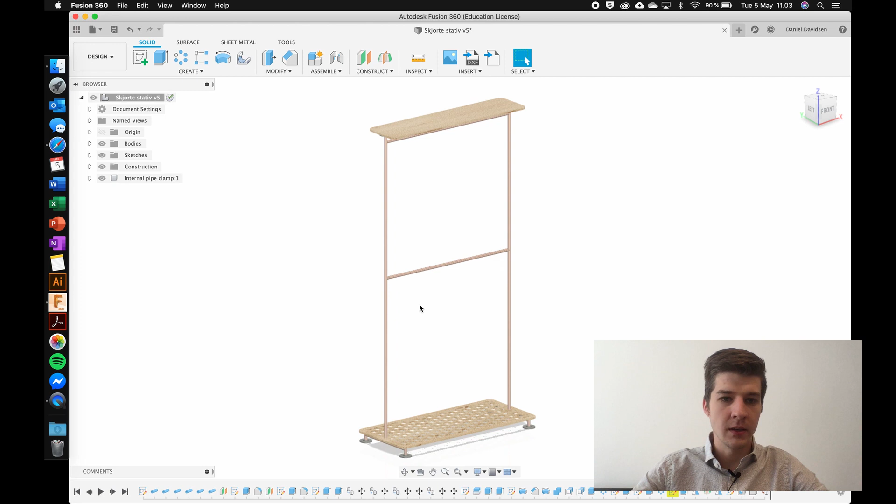So a small example that I have here today is that I made this small dressing shirt rack here, and in the bottom I made this plate. It has this particular pattern in it, and this is a perfect example of a job that you would run on a CNC mill. It would just take forever to do it by hand, but it's an easy job for CNC.

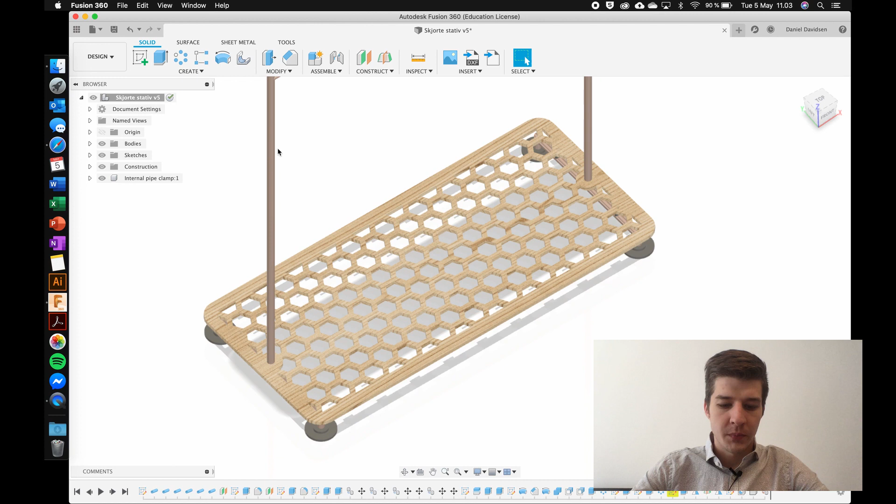So what we're going to do here first of all is go into the manufacturing workspace. This is a video about how to do the milling and not how to do the actual design, so we're not going to go into that.

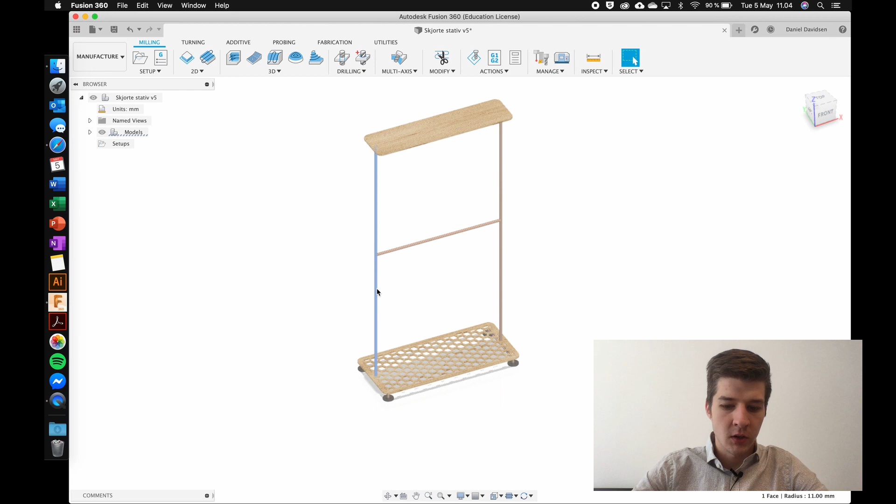Okay, so here we are in the manufacturing workspace. The first thing that I'm going to do is hide some of all this stuff. So I actually have both a top shelf and a bottom shelf here. First thing I'm going to do is hide all these pipes. If I press on one of them and type V, that's going to hide the bodies and components. So I have a few bodies here.

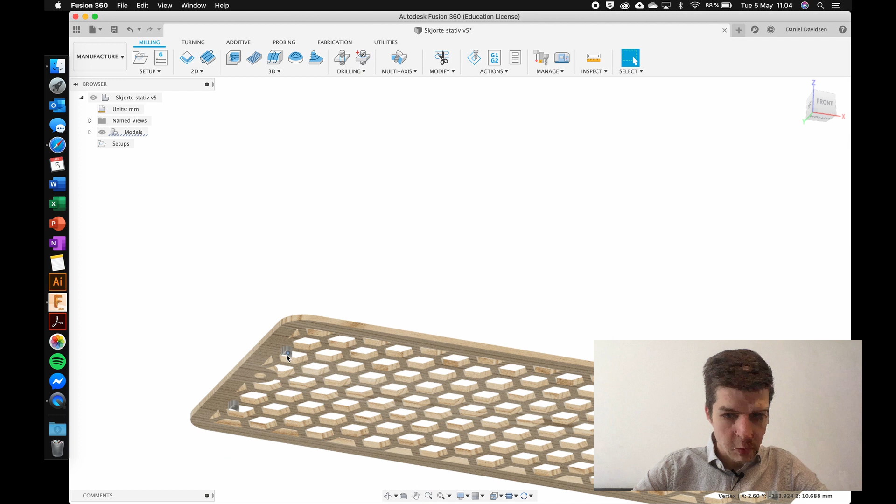And I'm also going to hide these feet. And then I also have some small spacers in here that I'm going to hide away. And for now we're also going to hide all the things here on top. I'm just going to highlight those, type V. So now the only thing that I have in my workspace is this one sheet here, and this is what I'm going to set up for the CNC mill to do.

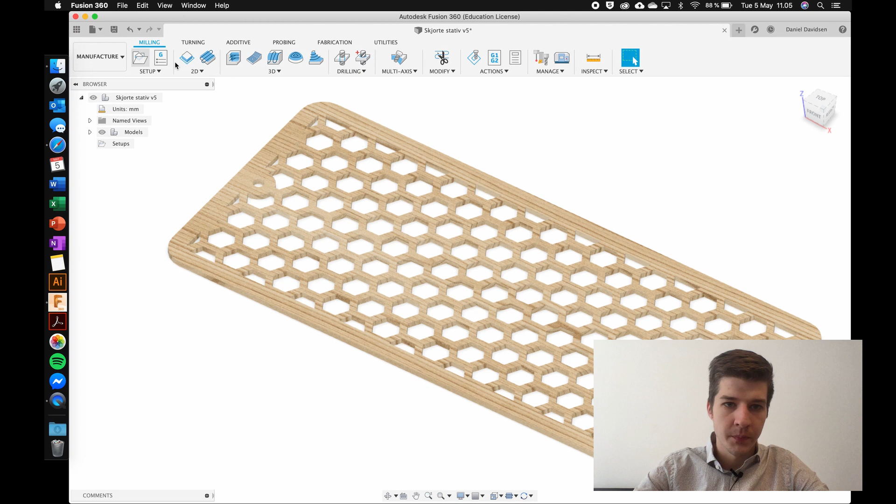Okay, so what we're going to do here is set up the job. The first thing I recommend is that we figure out how the setup is going to work. So the first thing we need to do is click Setup, and that is going to start out by highlighting your model. Because we hid everything, it's going to only select this one part as the selection and the work area, shown by the stock around it here.

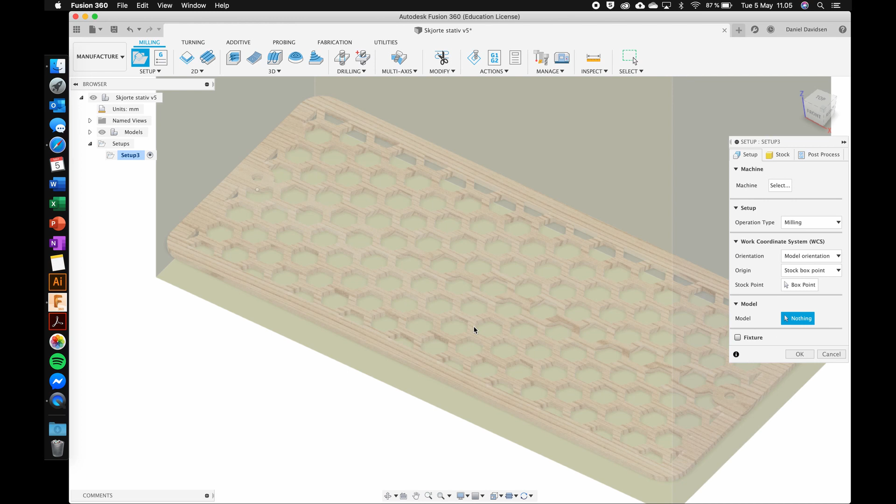If yours is bigger, it might be because your model is not selected correctly. So if I unselect this, you might see that it's trying to put the stock around the whole cabinet or the whole rack. So what I'm going to do instead is just click on the model here that I want to work on, like this.

The next thing I want to do is take care of this work coordinate system, and that's where the start point for the CNC mill is going to be and how the orientation is supposed to be. That's going to be specific to each machine. Where I work, we have a CNC mill, and we put on our website how the X, Y, and Z are going to be.

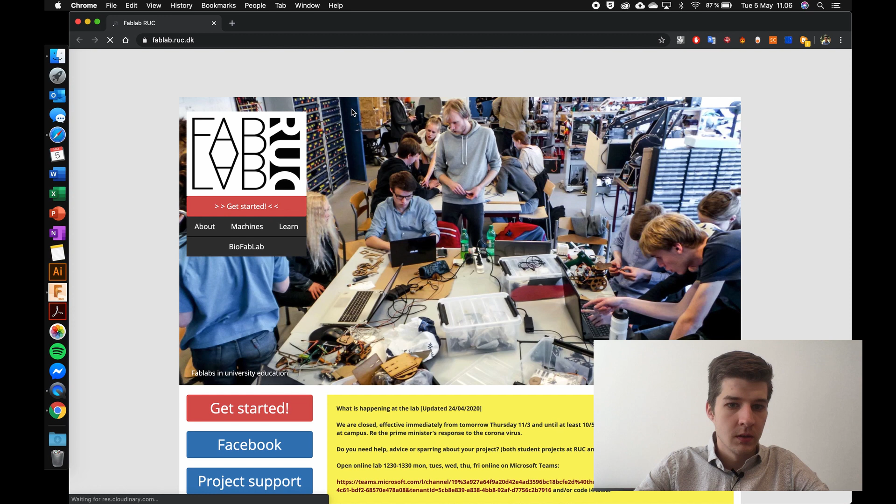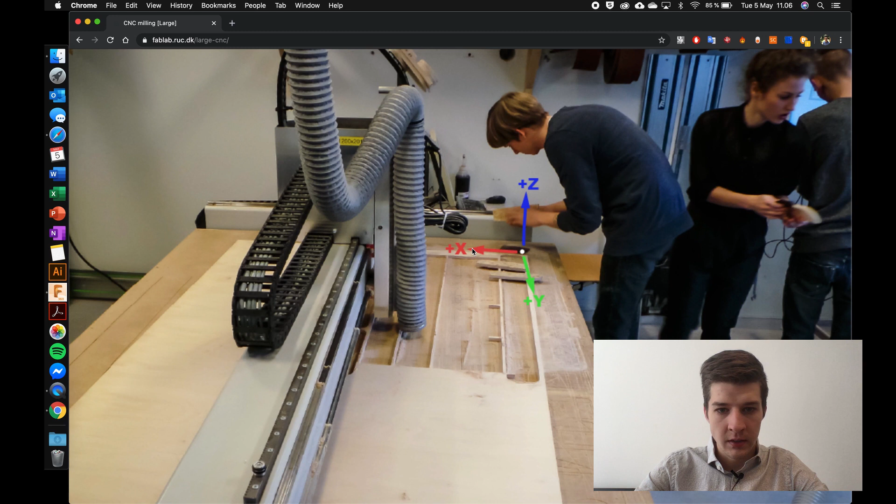So if I go to Fab Lab, under here we have the tabs for machines, and all the way down here at the bottom we have something called the CNC Milling Large. This is the machine that we're going to operate. So we put in the picture here that this is the X direction, this is the Y, and upwards is the Z direction.

And we usually put the start point here in the end, so that's also how I want my start point inside of Fusion to be.

Another thing while you are here that you might also want to do, down here for Fusion 360, is use the tools that we have available. You can download our tool library here. If you press this button, it will direct you over to Google Drive, and you should be able to download it up here in the corner, which gives you a file that you could save.

Okay, so how do we correct this work coordinate system? What we start by doing is this orientation, model orientation, or we can press this one, and we can either choose a Z-axis and an X-axis, or a Z and a Y-axis, or some other options. So what I'm going to do is choose the Z and the Y direction.

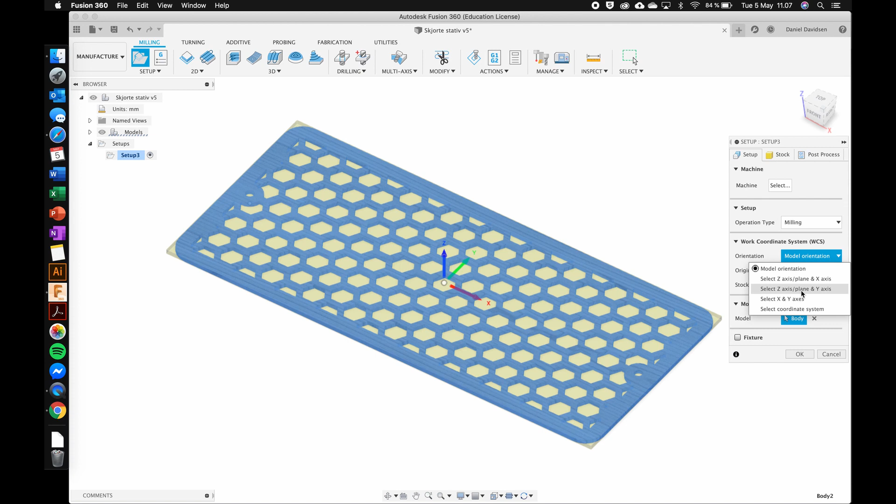It starts by highlighting the Z-axis here, and that is already going upwards, just as I want it. So I don't necessarily have to give that a direction, but I can select either a face that is normal to or perpendicular to the Z-axis. So I can press this top face here, and that's going to give me the way.

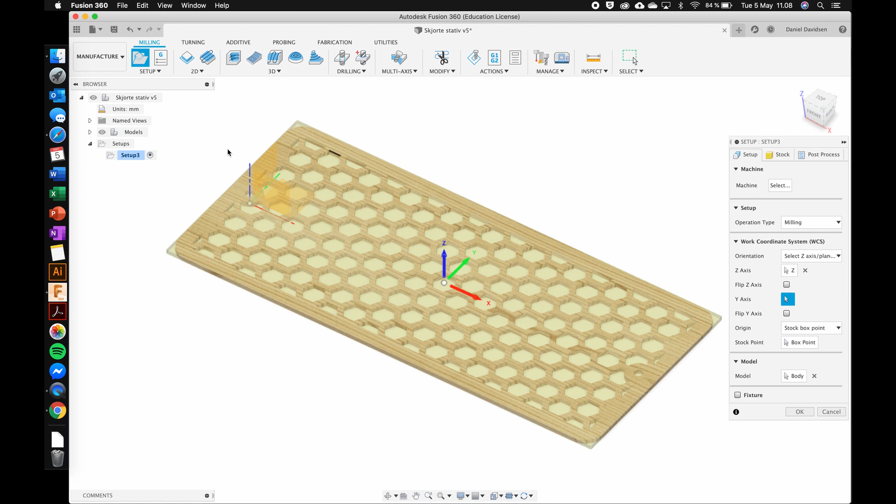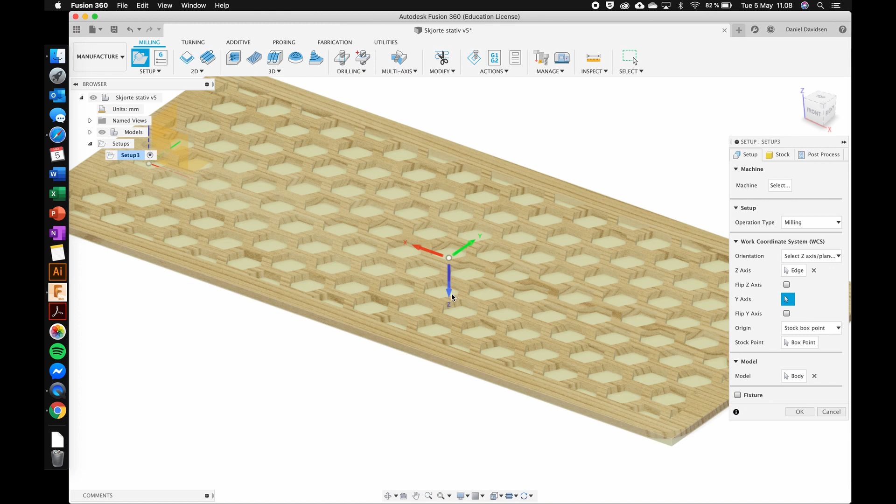I can also press this axis right here. An edge that is parallel to the axis, and I can even use my models, so in here we have an axis that is also going to be parallel to the Z-axis. It might be flipped like here because I chose an axis and it's just going to flip it. It's not a big deal. I can press either on this arrow right here and that's going to flip it, or I can press over here on the flip Z-axis.

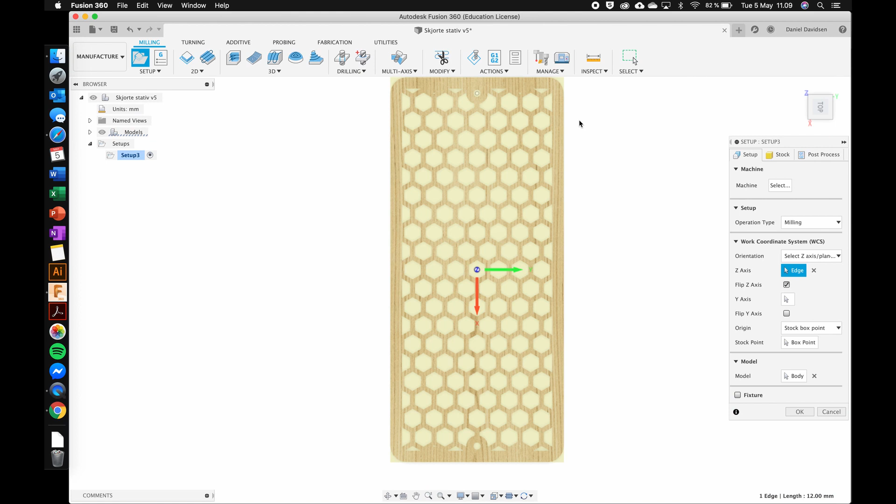So the next thing I'm going to do is, I want it to be the Y-axis. I'm just going to select that one. How I want this to be oriented is that I want the start point to be up here, and I want to have X in this direction and Y in this direction.

So I'm just going to press Y-axis, and I'm going to press this one here, and that should flip it so that my Y is now parallel to that axis. But again, if we go into the plane, I want the Y-axis to be pointing in this direction, so I have to flip it. So again, I'm just going to press on this arrow, and now you see that I have Y, X, and Z in all these configurations.

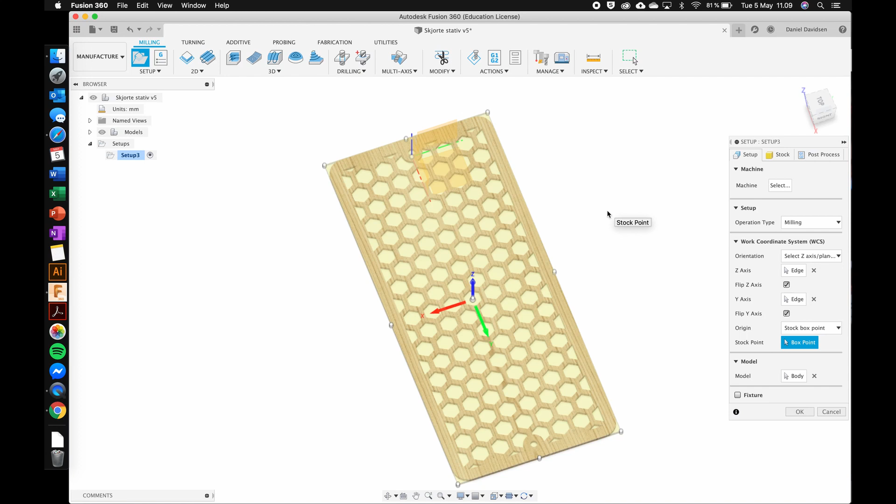Now I just want to put the start point here up in the corner. How I'm going to do that is I'm just going to press this one, stock point, and that's going to give me different points on the stock here. So I get some points, and I can press, for example, this one, and I want to make sure that it's on the top one up here, because when I go in with my CNC mill, I'm going to touch off on the top face, and that's going to be our start point.

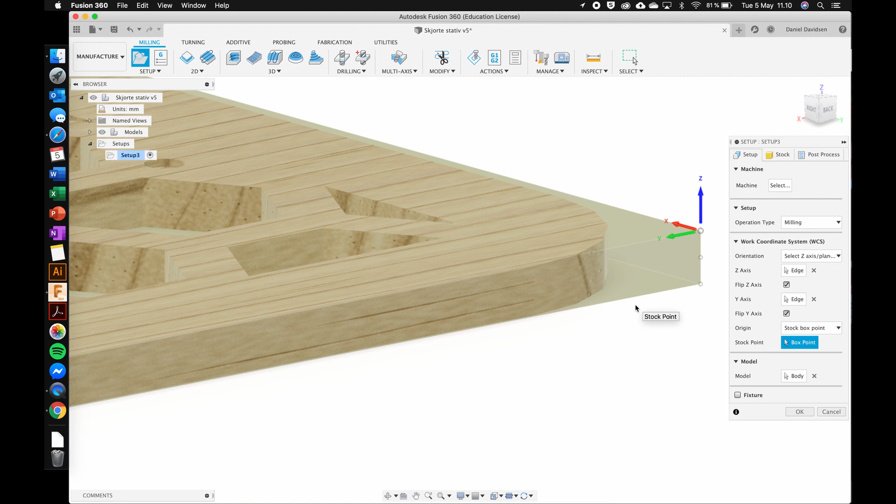So the next thing that I want to do is make sure that there is no additional stock. Underneath this tab right here called stock, there is this thing called offset mode, and I can put this to no additional stock. First of all, I'm just going to show you what it is.

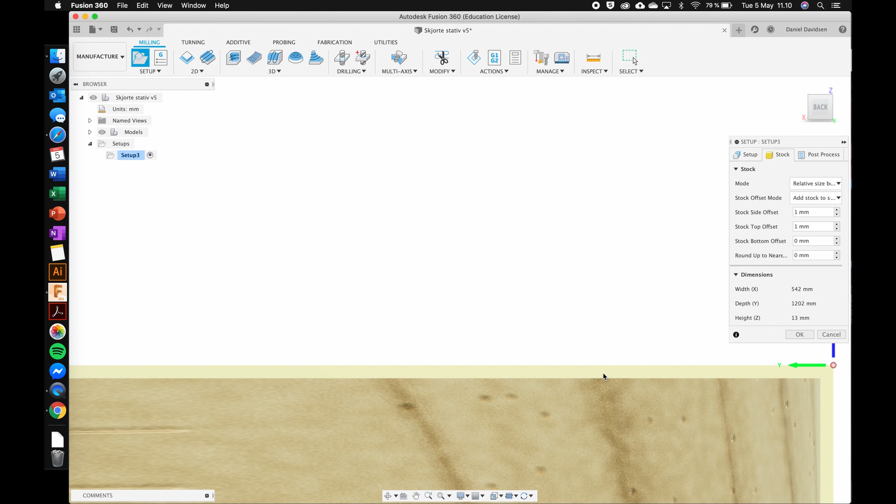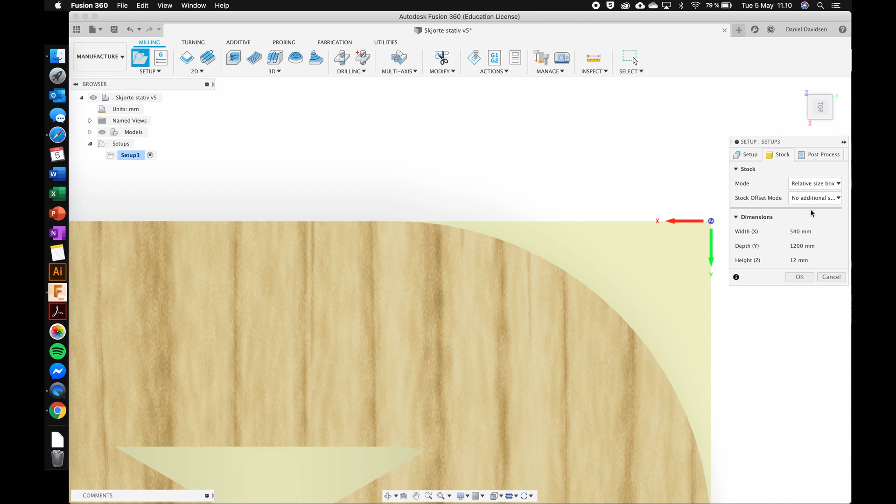So if I choose to go to a face that is directly on the side, you can see here that it puts a little bit of stock on the top side, and I don't really want that. The same thing goes for the sides, that it puts additional stock on the outside. That's usually what we need to do for metal work, especially because we want to face off sides or something. We don't really need to do that in wood as much, so I just recommend you to do no additional stock mode.

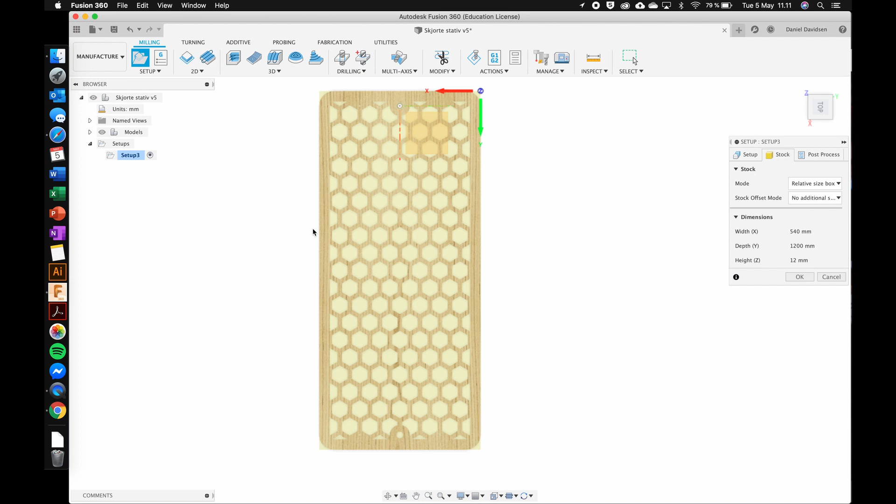So that's just going to put this as the dimensions that you need to cut. So I'll need to have this piece. I can see here that it is 1,200 millimeters in this direction, and it's a 12 millimeter thick plate, and it's going to take up 540 millimeters in this direction. So that's all I'm going to do here, I'm just going to press OK.

So now I have the setup done. Now I have to create the tool path that is going to tell the machine how to operate. So this pattern right here has a lot of these internal holes, and I don't want to select every single one of them. I just want to make sure that it actually does cut the inside of all of this before it cuts the outside. It's very important that it doesn't cut the outside first.

So the way I'm going to do that is, we have a lot of different toolpaths to use from, but you can use the contour mode under 3D here. So if I tap this button here, I get my menu, and then I have to start out selecting a tool that I've got to use.

This is where it's important that you had downloaded the tool library that we had. So right here I have what's called the Raptor machine. This is the tool library that you just downloaded, and in here we have different tool selections. When you want to import a tool library, you have to right click on local and then press import, and then you just have to tell it where the location is. For me it was under downloads, and here is my Raptor tool library. I'm not going to open it because I already have it.

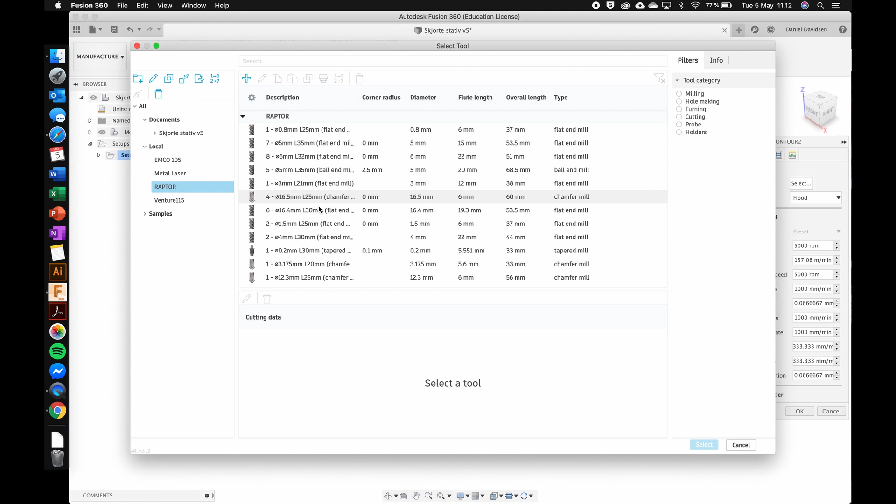So Raptor, and the tool that is most often used in the machine most of the time is this 3mm here.

With the new tool library here, we also added cutting data, so you can select softwood right off the bat, and that's going to have a lot of the different parameters built into the tool, so you don't have to do as much fiddling around. So I'm just going to select that.

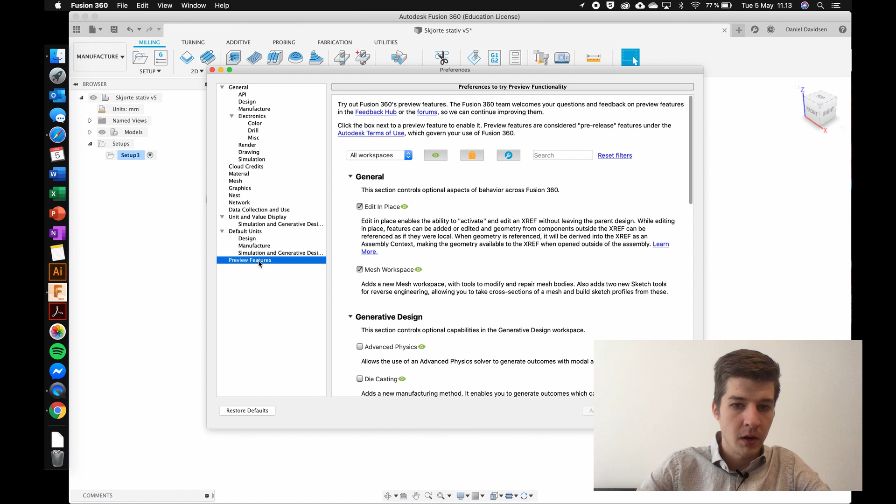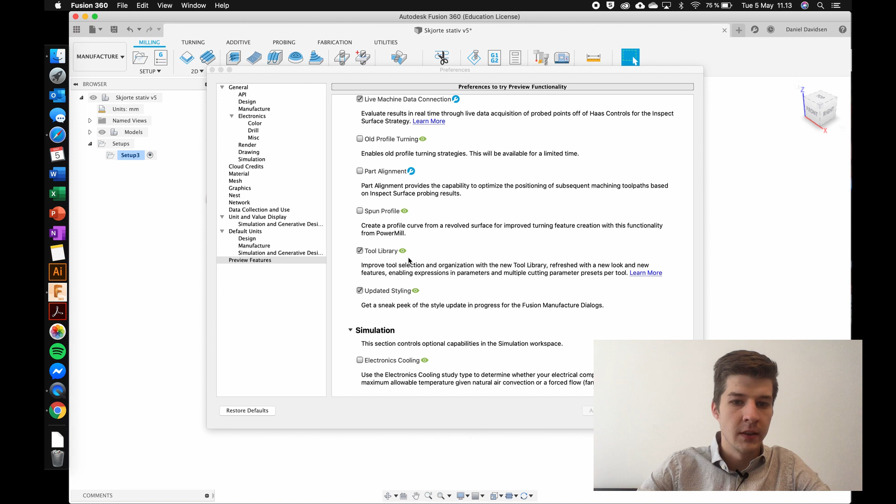If you don't have the tool library looking like that, you could go up here under your name, then go under preferences, and down here at the bottom there's this preview features, and under manufacturing there's this thing called tool library. Right now it's a preview feature. I recommend you turn it on just because it will improve how your selection works, but in the near future this isn't going to be here anymore because it's going to be default inside of Fusion.

Okay, so contour, that's all what we already did. Selection tool, Raptor machine, and this 3mm and softwood. You can also do the presets right here, so you can choose either the default preset or the softwood. It's programmed so that if you do the softwood, it's going to have the correct feed rate.

So the important features you have right here is that we are spinning our spindle at 24,000 RPMs, and the cutting feed rate we're using is 1600 millimeters a minute. That's because the step down - what's called a step down - is how deep the tool is cutting at each pass. You have to figure out the correct feed rate compared to how deep you're able to cut.

Okay, so the next tab up here is called geometry, and what you have to do here is select where the tool should cut inside. So if I choose this outer perimeter right here, it's going to default to selection and have a chain machine boundary. So what I'm telling the machine is that you can only work inside this area. You're not allowed to work outside of that, and because of that, it's also not going to cut out the outside perimeter of all of this.

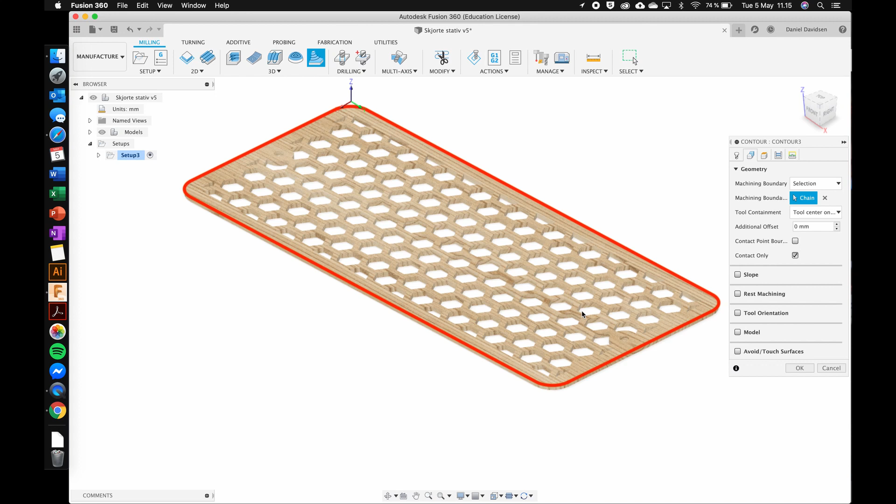So the next thing I want to do is go under tabs, this tab up here called heights, and on the bottom height I recommend you, when you have a through cut like this, put it to -1 millimeter. That's just making sure that in case the material is maybe 12.2 millimeters thick, or the whole bed of the machine isn't level, we actually cut an additional millimeter below just to make sure we get a cut that goes all the way through.

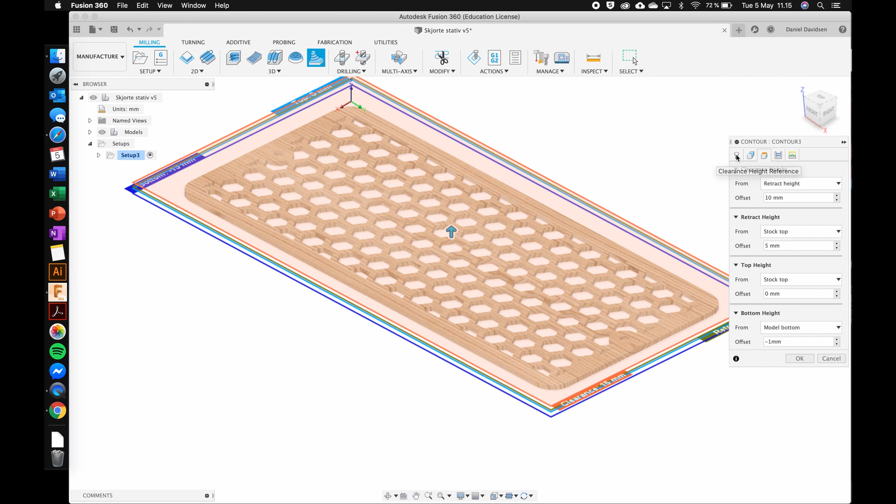So the next thing here is heights. We're not going to do anything in here because we already have the tool library done, but the important parameter in here is that there is a maximum stepdown that's set at 8 millimeters. We might come back and change this, but I'll show you in a minute what it's for.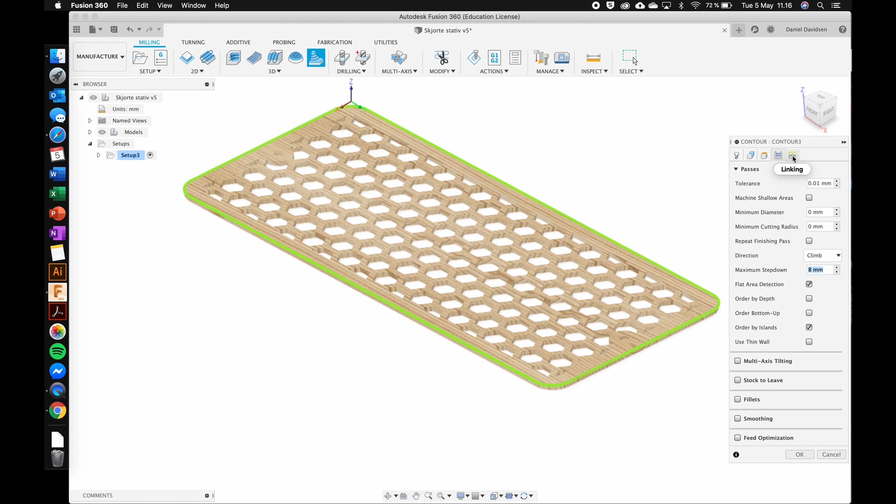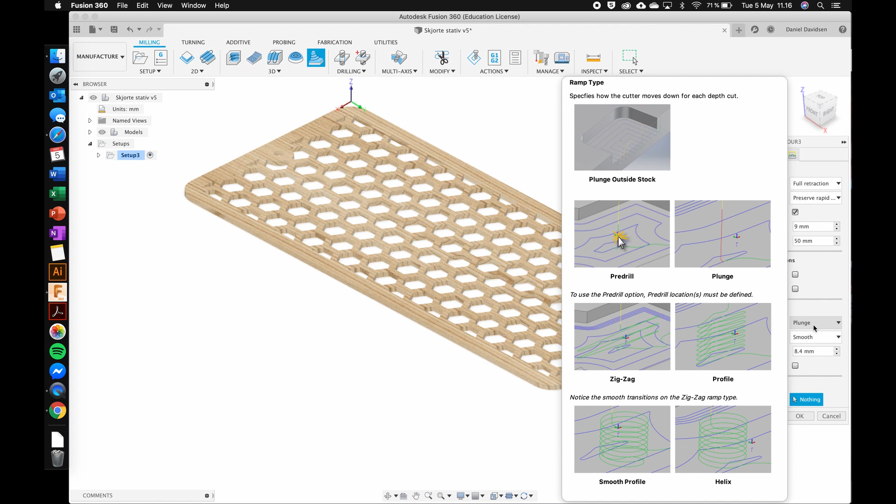The next thing is called linking. What I recommend you do here is turn off lead in and lead out and put the ramp style to plunge. If I hover over this, you can see some of the different things, where plunge is the second one here, where we just go straight into the material, where helix is the one on the bottom right, like going in a spiral, going into the material really slowly, which you need to do for good chip evacuation in metal, but it's not necessary for soft materials like wood. So plunge is just what I recommend you people to do. And then I'm going to click OK.

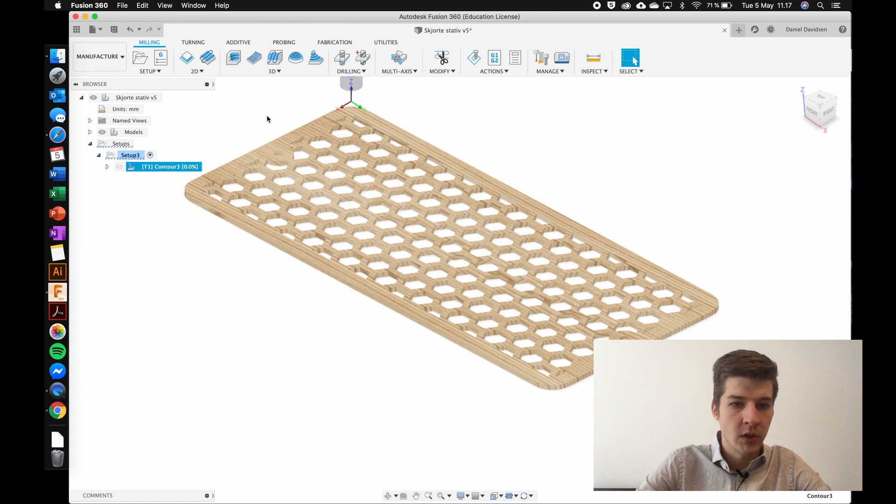So this is going to generate a toolpath, and it can take a minute to process, because it's going to calculate everything and figure out how to run it, and then give you a preview of how the tool is going to move. So there we go - all the blue lines show where the bottom of the tool is going to be. Each line represents how deep it's going to cut. It's going to cut in 3 passes - around this blue line, then the other blue line, and the last blue line in the bottom.

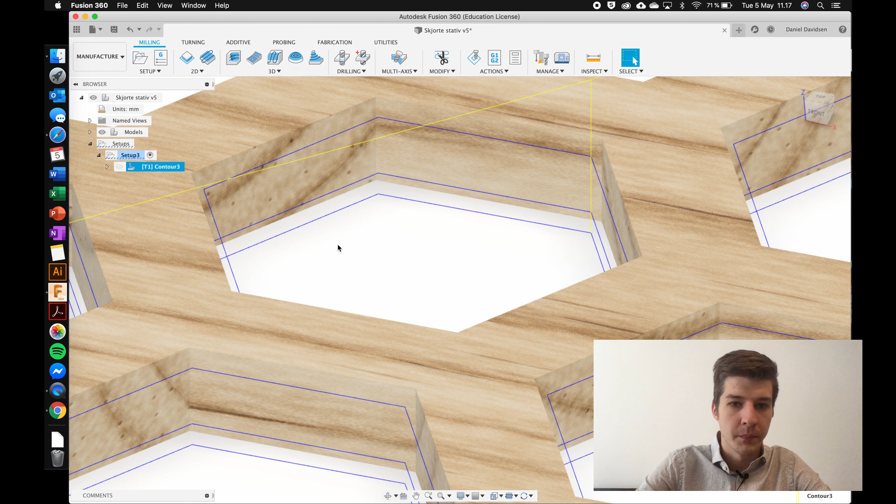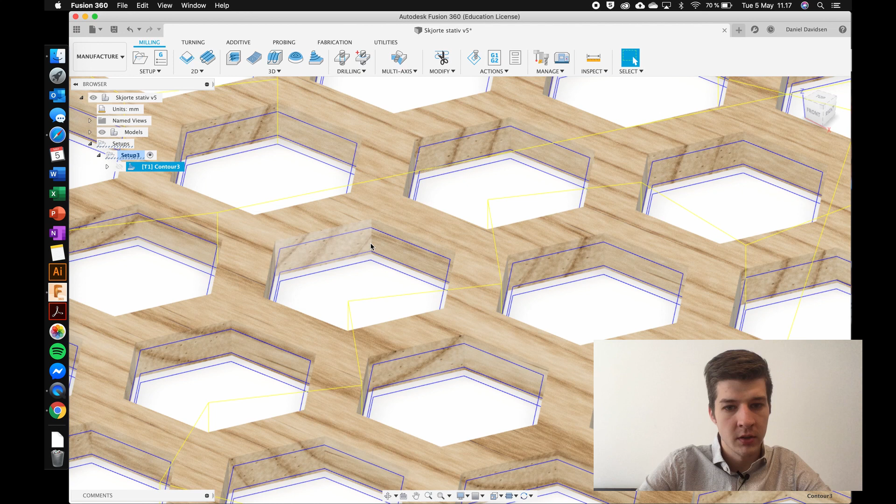And then we have all the yellow connections, that's where it's going to go up and over and into a new hole. So I want a 12 millimeter plywood sheet to be cut in 2 cuts, going down 6.5 millimeters first. It's going to do a 12 millimeter cut total, so half would be 6, but I added another millimeter at the bottom. If I put this to 6.5, it's going to go halfway through, and then do the additional half.

So I'm going to correct that by right-clicking on contours and clicking edit. Here on the passes, I should put this to 6.5 millimeters. And I also need to turn off this flat area detection.

If I leave it on, you can see it's still going to have these 3 levels in here. It still has 3 different levels, and I don't really know why. I just figured out if I turn it off, it's going to remove it. So if someone finds out why, please tell me in the comments below.

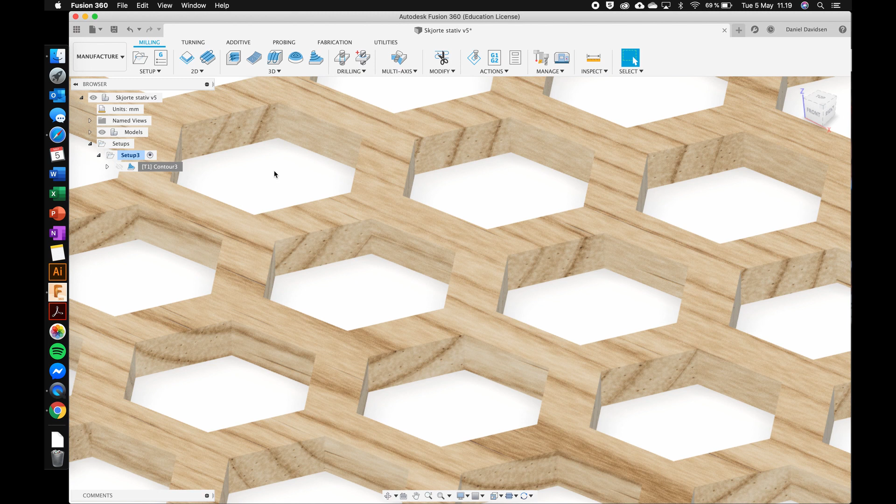So now you can see it's doing it in 2 steps. That's how I want it. It's going to go 6.5 millimeters down and do the rest of the cut.

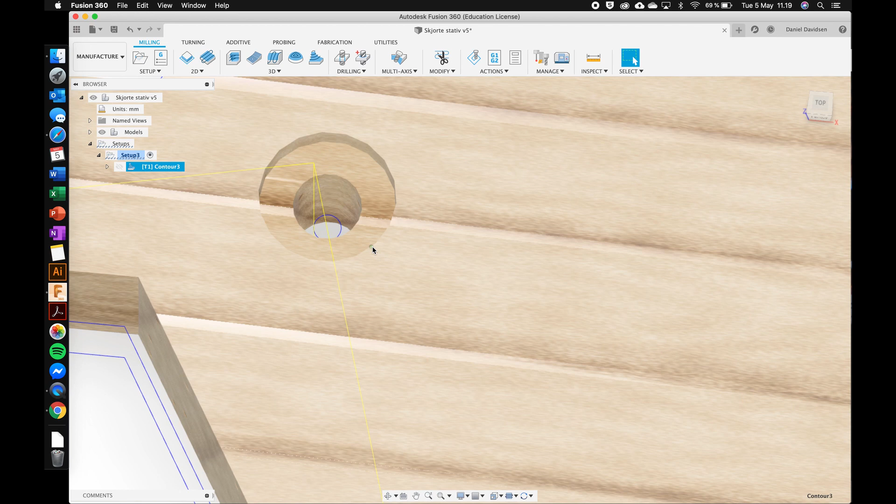Okay, so now I have everything cut out. I just want to make sure that it also goes into these holes I have here, and that it's also going to do those 2 steps. It is, so that is perfect.

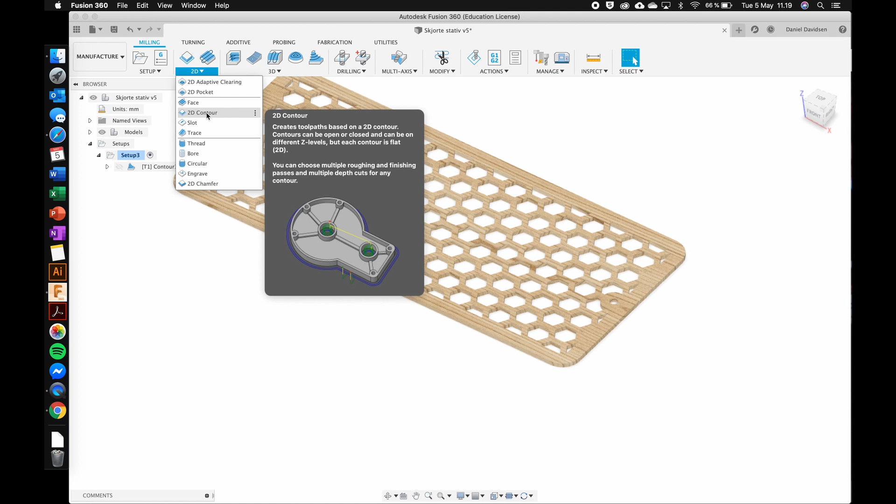So right now we have cut everything inside. Now we need to cut the outside. For cutting out the outside, I recommend using what is called a 2D contour instead. You can also click here and find it as a 2D contour. The difference from the 3D toolpaths is that with those you have to tell Fusion where to work inside, and with 2D you have to tell it exactly where to cut.

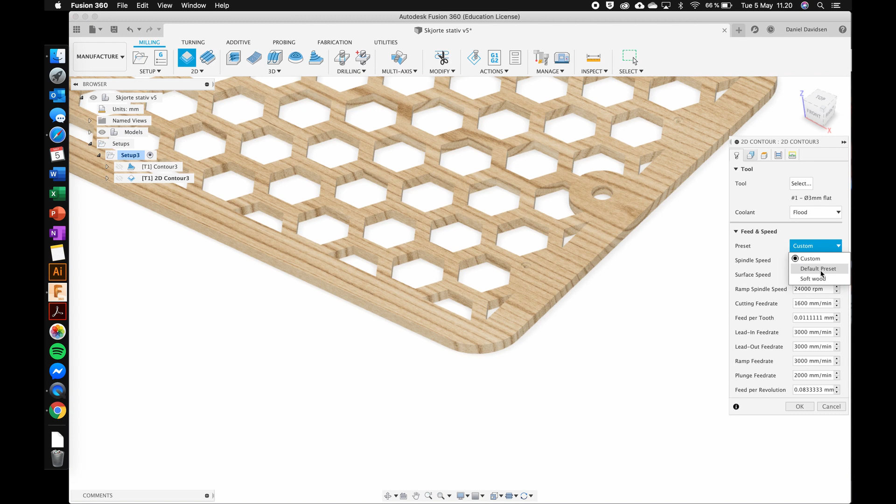So if I choose 2D contours, it already pre-selected the tool I used before, so that's good, I want to use the same tool. Under presets, I'm going to use softwood again. I'm going to go under geometry, and here you have to select a contour. It's very important that you select the bottom of your contours that you want to cut out.

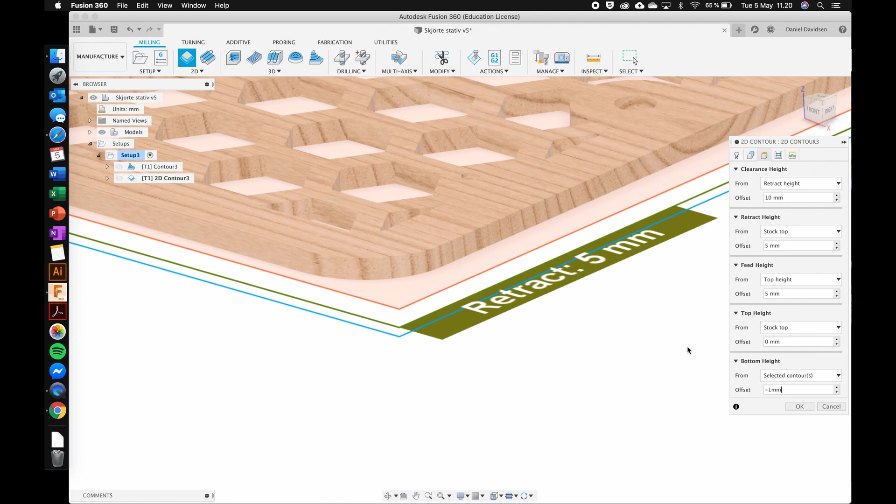The reason for this is under the next tab. On the bottom height, it's selected as the bottom height of the selected contours, so that's why I selected the bottom one. This one is going to be -1 millimeter again, just to make sure I cut all the way through. And under passes, what we before called step down is now called multiple depths, it's the same thing, so I'm going to put this again to 6.5 millimeters and leave the rest of the settings like this.

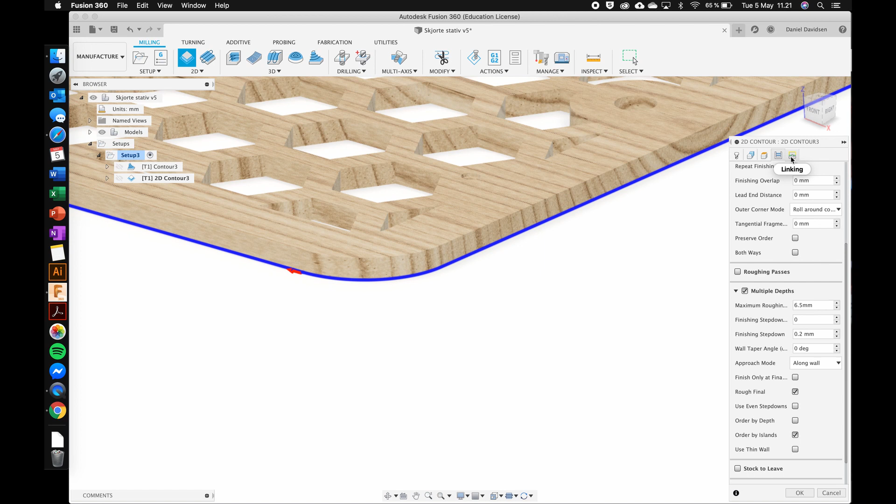Linking should already be set so it doesn't have the helix style. And again, I might be tempted to turn off lead-ins and lead-outs, then pressing OK. So you see again, I get these 2 lines going around, showing me how it's going to do it.

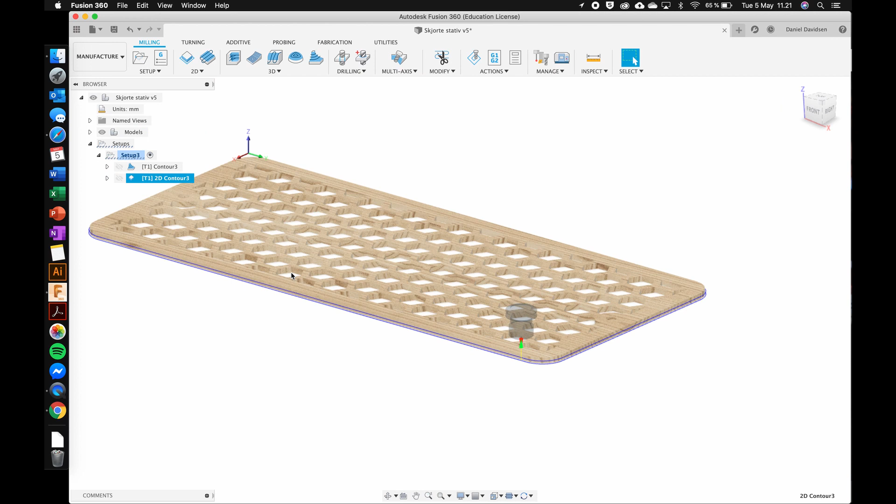Now the amazing part about Fusion is that I can simulate how all of this is going to cut in real life. If I go under this one up here and first click on setup, that means I want to simulate everything inside the setup. I press the simulate button, I can press stock, which puts a box around so I can see where it's going to cut, and then I can press play.

So now you can see in here how it is going to cut out the different parts. You can see that it cuts out first and then goes deeper, and it cuts out the second one, then goes up and over and cuts the next part.

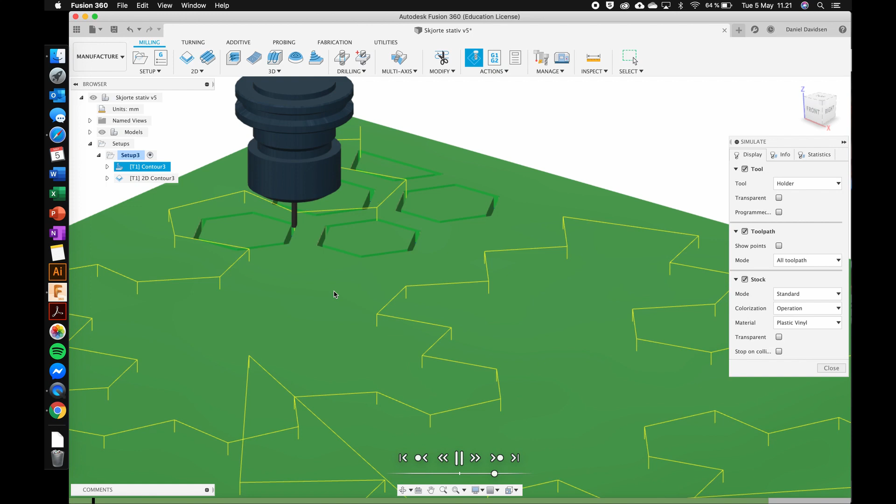So if you want to speed the process up, you have the speed control right here. I can speed it up so it's going really fast, or slow it down so it's going rather slow.

And down here in the bottom, I have what's called the timeline, showing me where the tool is right now. You can see right here that this tool is going to stop this command, and then do the other command. So just like this one up here, this determines the order, it's going to start doing this one, and then jump to the next one and finish that part out.

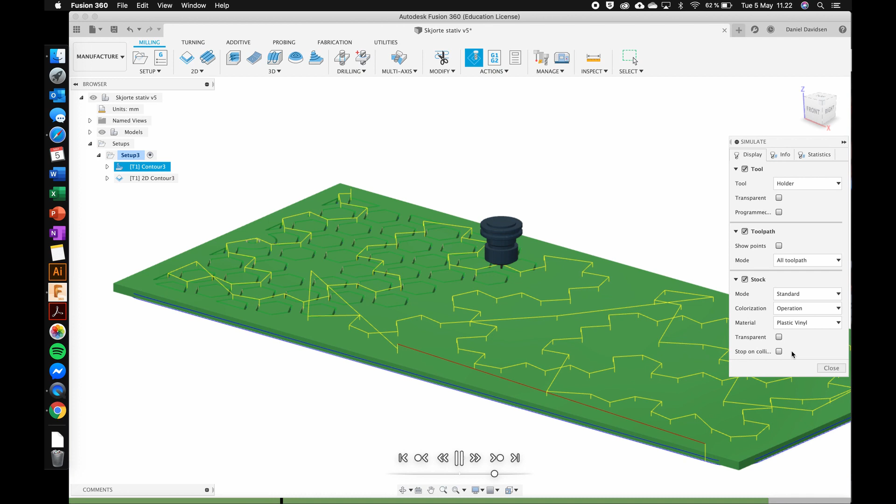So if I close this and drag the 2D contour above the inside contour and simulate this once again, you can see how it's going to start out cutting the outside perimeter, and then after that do the inside.

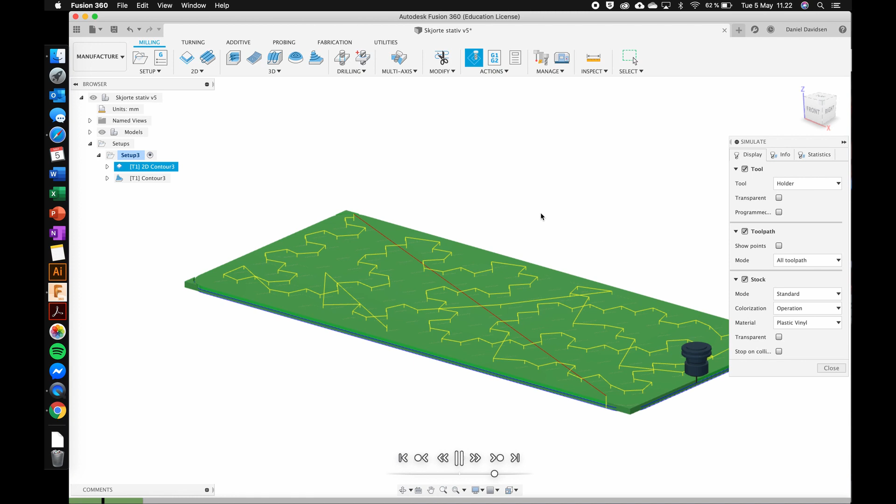And that's not what we want, because cutting the outside like this will make sure the sheet in here is loose and will wriggle around, so it's not going to be precise anymore. So we don't want it to do that.

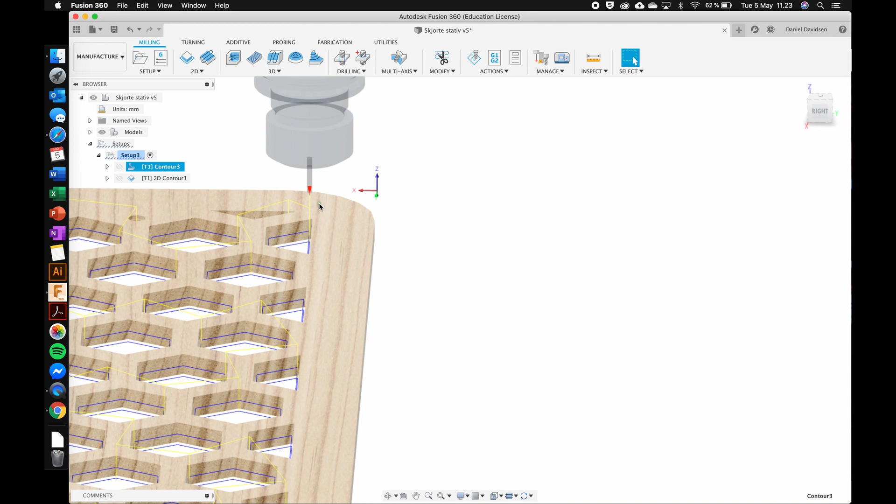So it's a good way of error detection if there's something wrong. You can also see it's going to tell you if you're doing too deep a pocket. Of course, our tool has stick out here - the amount of stick out on the tool usually depends on how people add in the tool, but most often this is the default amount of stick out.

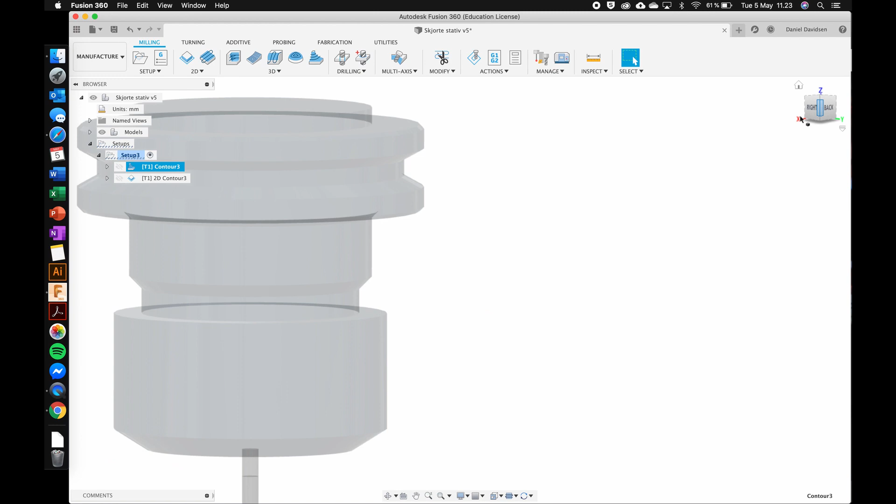There can still be errors, but Fusion is also going to give you an error if you're crashing the tool into the material, like if you're sticking in so deep that the tool head up here is going to crash into the material. It's going to give you errors like that. So this is just a simple way of doing the 2D contour here.

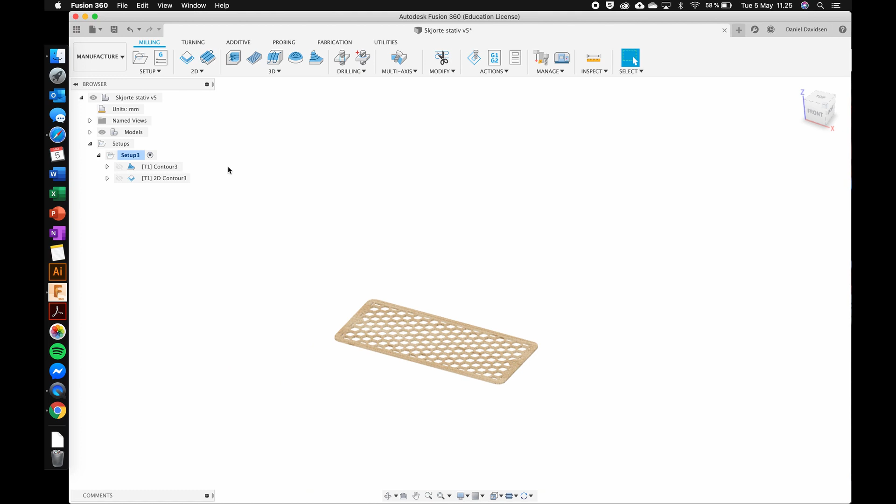Okay, so now if I wanted to do the top one as well, because I also had the top shelf, I can right click on this one and show all bodies and show all components. That's going to give me all my things back. And I also want to cut out this part up here, but this one is just a 2D contour around the whole place here. So what I can do is duplicate this setup right here.

So if I click duplicate, it's going to give me a new setup down here. First thing I'm going to do is activate it, open it, and I still have these two contours. First thing is the setup.

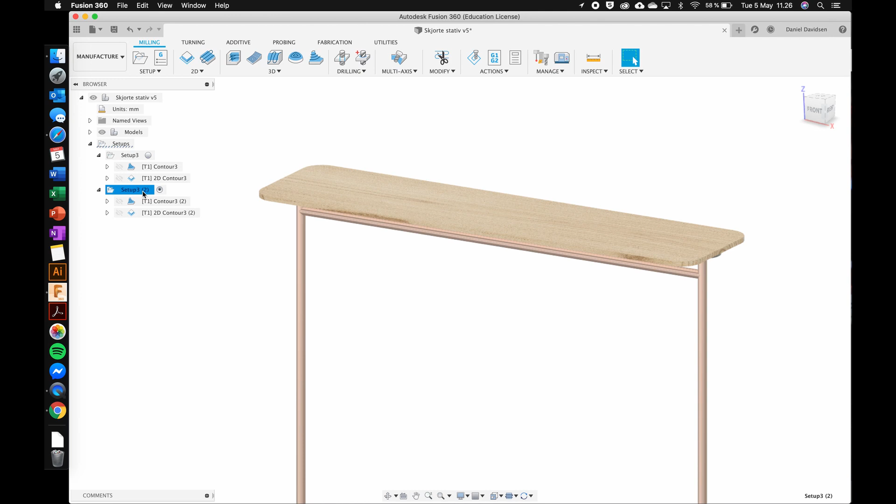I can right click on setup, choose a new model. So if I click that and click this one up here, you can see it automatically did all of that and put the start point at the right place and the Y and X axis, and again, no additional stock. So I can just press OK.

It's going to give me errors because it cannot figure out how to do these cuts up here, because I haven't selected the correct contours. We just talked about that we only need the 2D contour moving around the outside, so I can just click on the 3D contour and press backspace or delete.

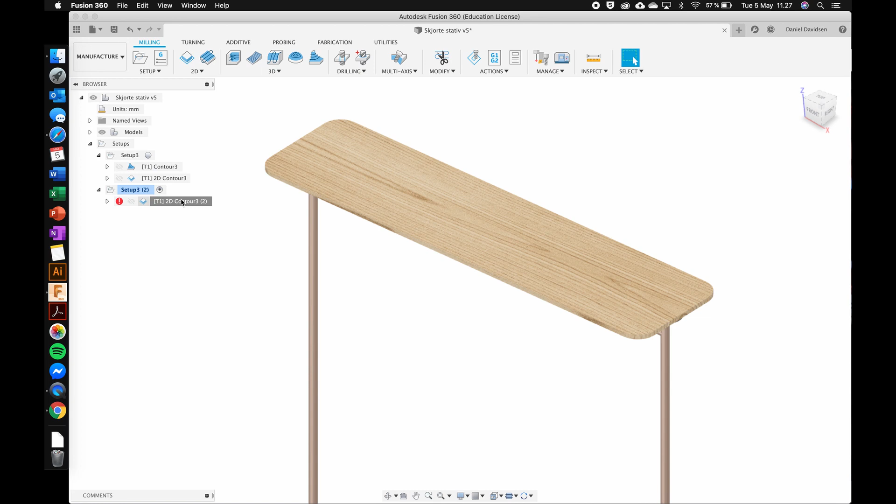And then I have this one. If I right click and press edit and do geometry, you can see if I zoom out that it still has this down here selected because I duplicated it. So I'll just click on the X. Then clicking on the bottom again, pressing OK.

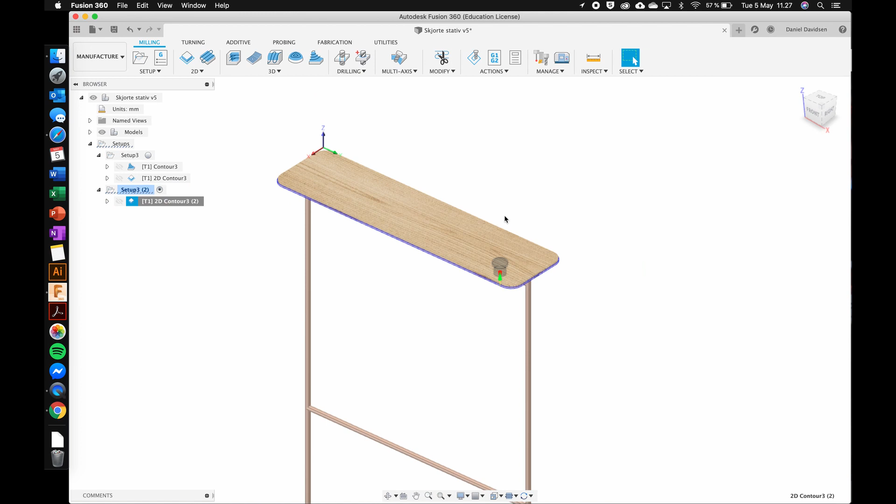It's going to generate the toolpath, and clicking setup, then clicking simulate, I can see that it does the exact same thing here, so it works.

Okay, good. Last thing you need to do when you're going to run a job is export the code that is actually going to be run by the machine. So we're going to click on the setup and right click, then click post process.

Under post processor we're going to have to choose this one, Mach3Mill. So if I click on this one and I just press M - if I was under another one, I can just click M, and then I'll get to this place, and I press this one.

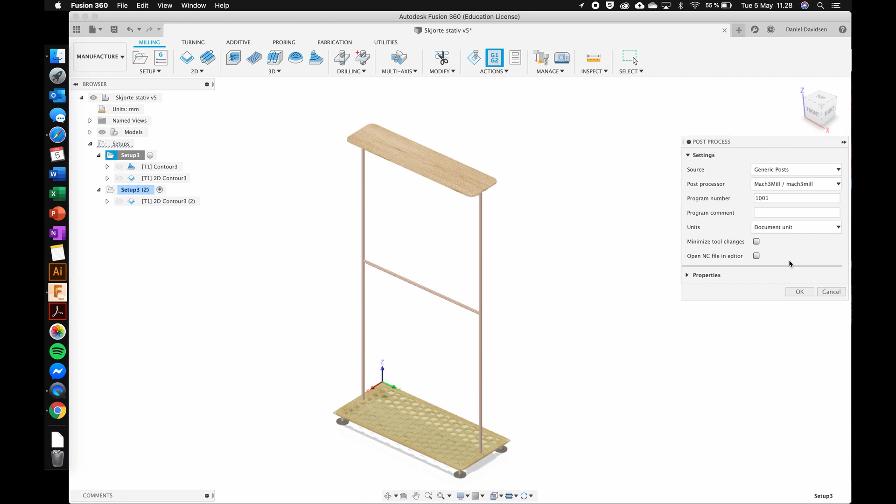The default is often that this one is checked. I just want to uncheck it, because we don't have to see the actual code and do any modifications to it. Then I press OK, and that's going to give me a place to save it. So I can just save it, give it a new name here, and I'm just going to save it on the desktop.

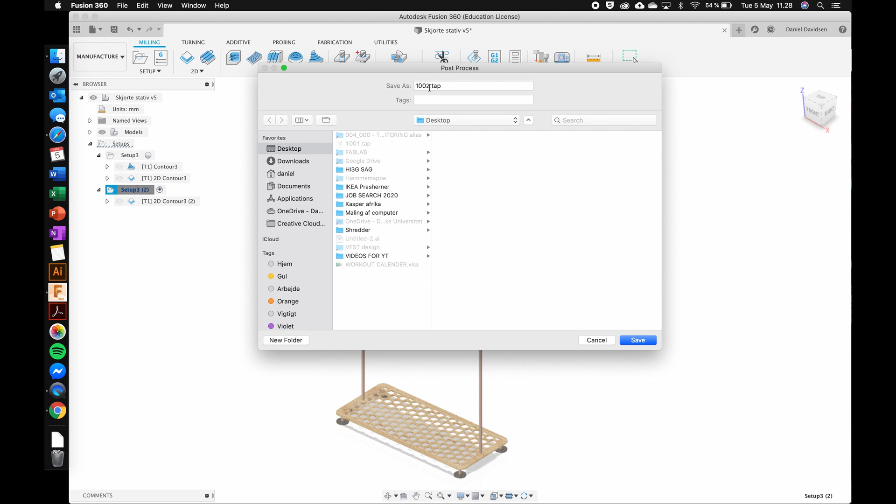If I want to export the other one, I can right click on this one as well and click post process. I can maybe call it 1002, and you can see if I press OK, it's just going to default to that name again and save it. And now I have the two G-code files that are going to be loaded into the machine.